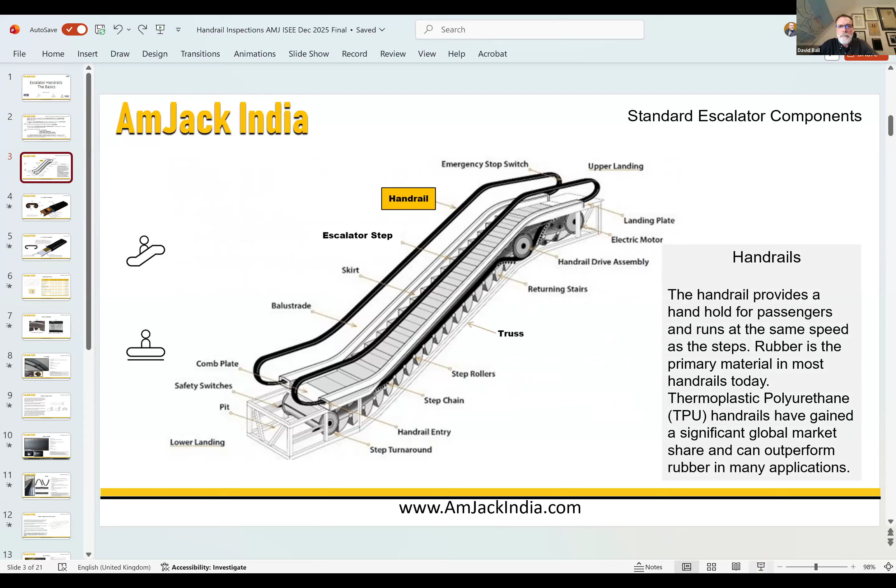We're going to start with this slide, which will help illustrate and guide most of our conversation today. These are standard escalator components. Today we're going to concentrate on the handrail component. The main purpose of the handrail is to provide a handhold for passengers and allow them to balance themselves entering, exiting, and riding on the escalator. Rubber is the primary material used in handrails today, but over the past 10 to 12 years, thermoplastic polyurethane (TPU), or in some cases just PU, handrails have gained significant global market share and can outperform rubber in many applications.

In terms of the escalator itself, today we're concentrating on the handrail drive assembly area. In this particular escalator, this is a reverse bend drive. I'm aware there are other handrail drive systems, but in service of today's time we're going to concentrate on this particular system, consisting of a main drive sheave. Either side of the drive sheave, we have roller bows, and this is where some of the adjustment in terms of handrail tension can be made. What's not particularly obvious from this image is that typically there is a roller chain or a hugger belt that presses the handrail against the drive sheave, and that's where drive pressure is adjusted.

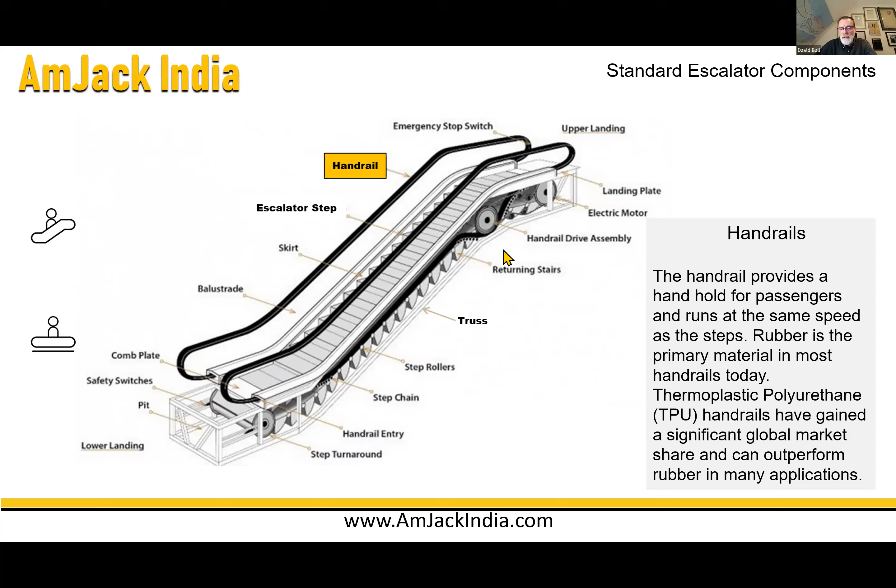This slide is meant to show a couple of things. On the left-hand side, we have the standard handrail labels or nomenclature. This is a cross-section of a rubber handrail, and we can see that typically one refers to the surface that you grab as the face. There is a crown transitioning around the handrail, there's also the shoulder, and then what will be covered on a number of slides is what we refer to as the lip area. The lip area, particularly the lip width, which is the distance between this surface and its opposite surface, is key for handrails operating correctly.

On the right-hand side, we have a cross section of a typical rubber handrail consisting of this brownish red material, which is referred to as the slider. On top of the slider, we see a fabric body ply. The orange part you can see is called the stretch inhibitor. These are a series of high tensile steel cords that run the length of the handrail. The main purpose of the stretch inhibitor, as you can deduce by the name, is to prevent the product from elongating or shrinking. Then again, on top of the stretch inhibitor, there's another rubber body ply followed by a fabric ply, and then it's finished off with a rubber cover. In this case, we see 6 different layers, all of different materials, all required to make up the SBR or rubber handrail cross section.

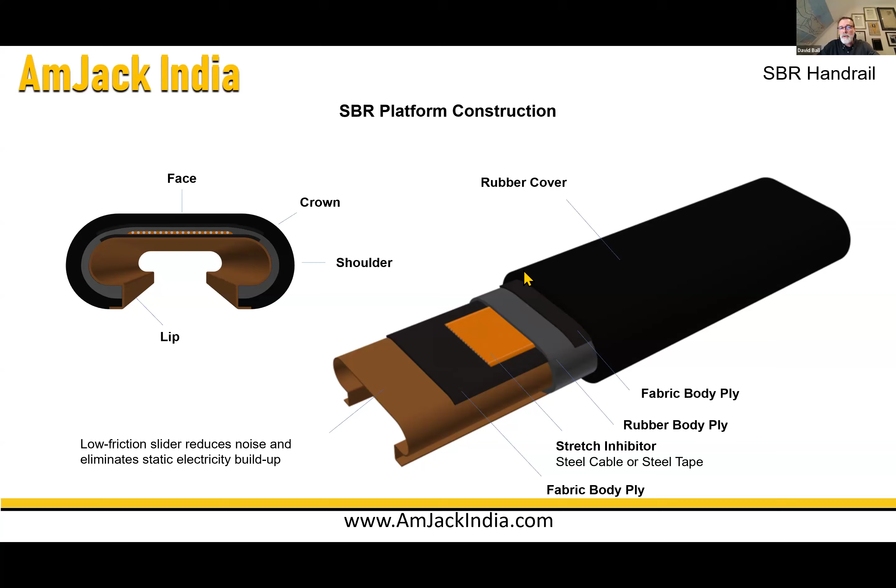By comparison, what we're seeing now is a TPU handrail cross section. If we go from right to left, we start with this white gray looking material, similar to the rubber product. This is the slider material, a spun polyester fabric which carries the handrail around the escalator and rubs along its guiding system. Again, we see stretch inhibitors, same steel cords, same purpose, preventing the handrail from shrinking and elongating. The only difference is in this cross section, there's only three elements. The third element is the thermoplastic body, which engulfs the other two components and completes the handrail section.

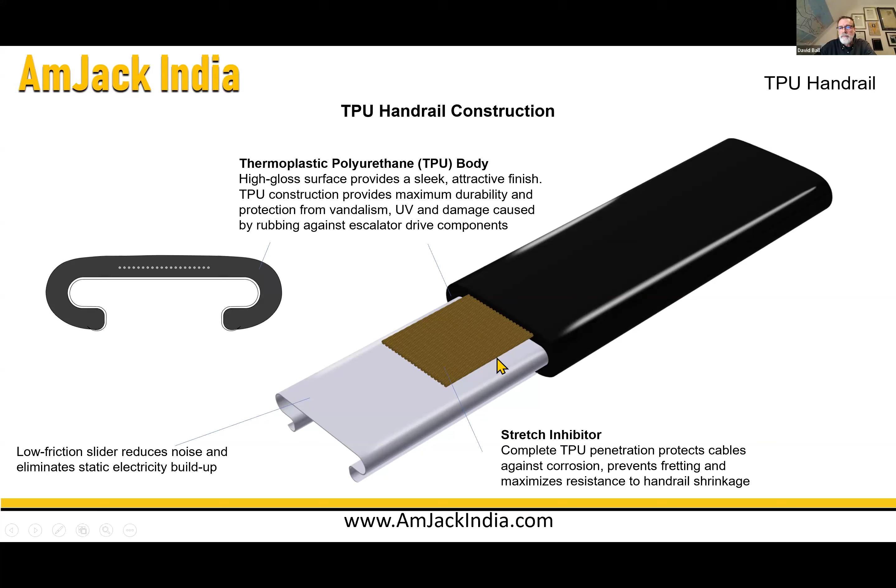So, handrail sections. A lot of questions that come from the field are: what handrail do I have, and what handrail do I need? If we start on the left-hand side of this slide, you can see a cross-section of a typical V-shaped handrail. All of the manufacturers globally have two handrail sizes or styles: a slim style and a standard style, one small, one large. Both the small and large styles can come in a C shape or a V shape. Sometimes in India, people refer to the V shape as a W shape - doesn't really matter, the fact is the cross section is visible here.

The main purpose of the V-shaped handrail is to provide the handrail drive mechanism with a larger surface area to drive the product. V handrails are typically used in heavy-duty, high-rise escalators or in public transit situations where the rider footfall is extraordinarily high.

If you are able to provide us with critical dimensions, illustrated in the image on the left, we start with the lip width, which again is the distance between this surface and this surface. We have an overall width, simply the measurement from side to side of the handrail product. There's an overall height, which is also important, and then there are two dimensions associated with the V. If you're able to measure these critical dimensions and provide us with the manufacturer's name and perhaps even the model of the escalator, then in most cases we can verify exactly what handrail style you require for your needs based on these criteria. If people would like access to these forms or tools, they can communicate with us after the show and we can make sure you get a copy.

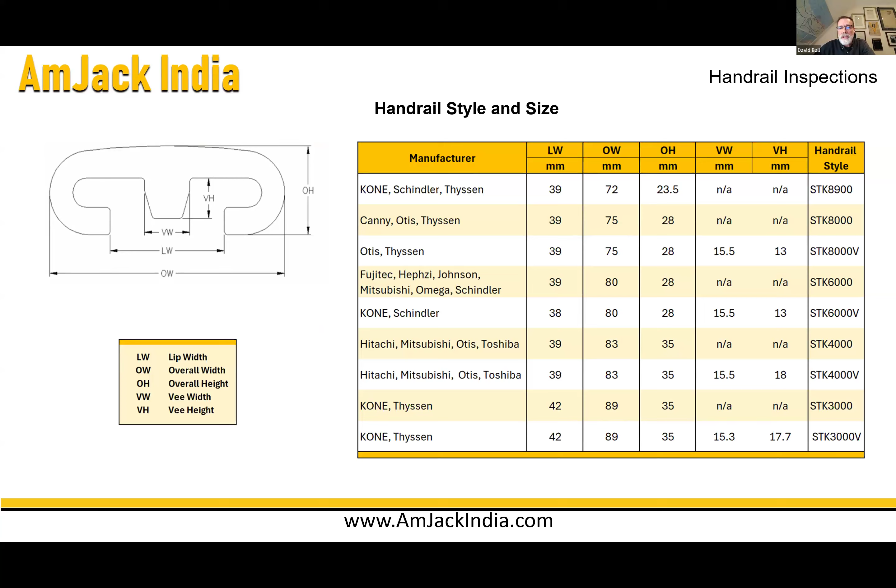In order to identify handrails in the field, all OEM certified producers must provide handrail identification markers on their product. On the left-hand side of your screen, you can see SBR or rubber, with a picture of the rubber handrail showing an embossed series of numbers and letters. On the right-hand side is a typical TPU handrail that has an etched series of numbers and letters.

These handrail identification numbers provide us with the age, the style, and the length information associated to handrails. So if you have questions about the handrails you're taking care of in the field, if you can locate this branding or handrail identification information and provide it to us, we can help you determine exactly which product you require.

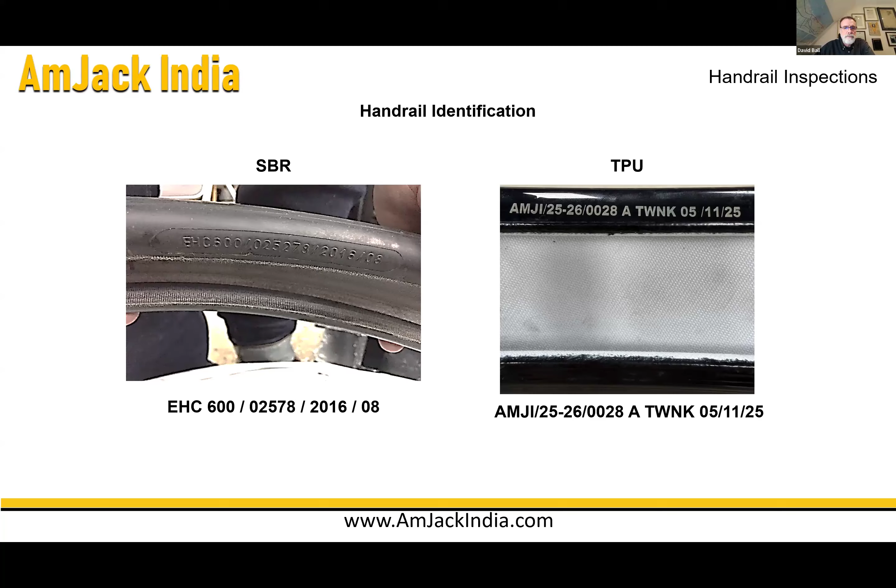The next few slides I'm going to show you are of typical feedback that we get from the field on a regular basis. Some of them will be issues developed by the running of the handrail, but in general we have a label at the top, pictures on the left, and on the right we have root cause indicators and hazards, and most importantly, at the bottom, we have recommendations.

Moving right along, we have, in this case, a defect known as lip buckling. This is a rubber handrail pictured on a newel end, and you can easily see the deformation of the lip area. This deformation is permanent and cannot be fixed or repaired, and is usually caused by improper coiling or uncoiling of a handrail before or after it's been installed on the escalator.

You can see in this image on the lower left, the handrail has been coiled and you can quite clearly see the deformations in the lip area. The only action required in this case is to replace the handrail.

We will come to coiling and uncoiling on the next slide, but in the meantime, one of the main points to pay attention to when coiling or uncoiling is not to do it aggressively, and to try and maintain an inner diameter when coiling of at least 700 millimeters.

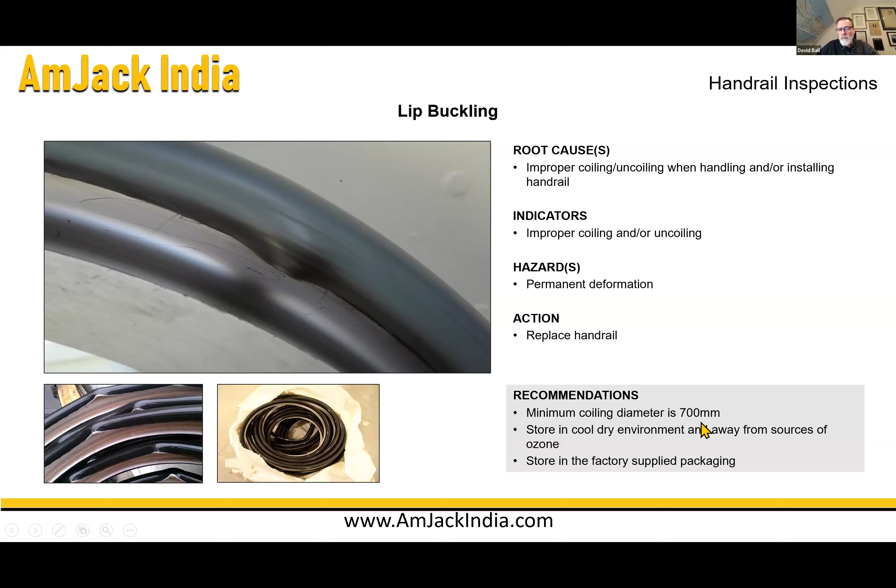As I suggested, another procedure which we have available, if you would like it, is the proper coiling and uncoiling of handrails. When coiling and uncoiling handrails, what we are trying to do is protect the stretch inhibitor from being deformed. Once the steel cables are kinked or bent or altered, they cannot be unkinked and they will eventually fail, meaning you will lose the service life of your handrail product. The best way to avoid that sort of problem is by learning how to coil and uncoil handrails properly.

Typically the handrail is laid flat on a clean and dry surface with the face down on the floor and a person either side. The two people simply take the handrail and begin to coil it, forming a basic donut shape, again making certain that the innermost coil is at least 700 millimeters. When handrails are coiled this way and stored in their original packaging in a cool and dark place, they can last quite some time.

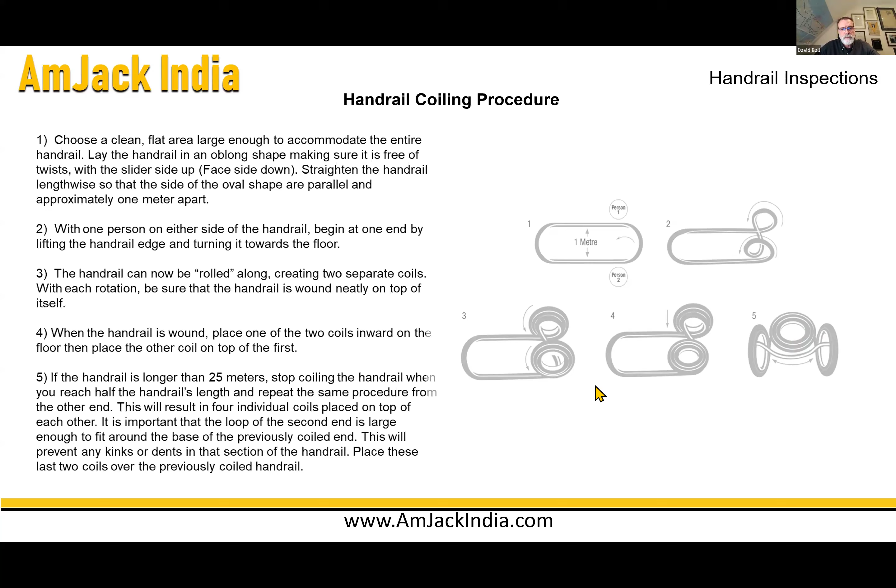This is exactly what an old rubber handrail should look like once it has reached 7 or 10 years in service. You'll begin to see these types of small weathering cracks. They are also an indicator that the handrail has been run in challenging weather or element conditions, for example high heat, high humidity, and lots of sunlight, UV, or ozone.

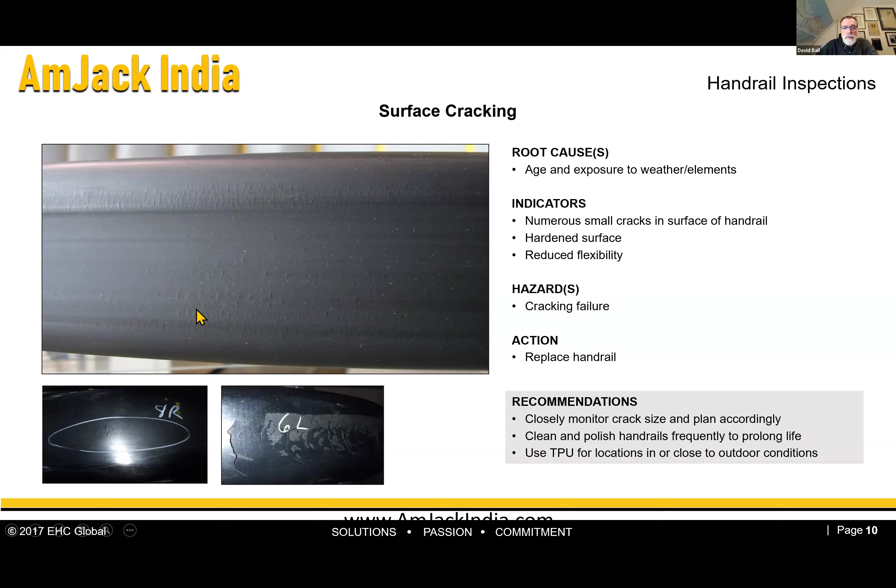Now, this issue that we're going to talk about next is called kinking.

Many of the OEMs or MNCs are migrating away from larger profiled handrails toward much thinner, narrower handrails. This is primarily for two reasons.

The first is that they wish to make the handrail graspable by most people. Small children, large and tall people are able to grab a smaller handrail more effectively. And if people are able to hang on to the handrail, their ride experience is going to be safer. So when the handrails get smaller, more passengers can grab them, and that's ultimately a more safe passenger experience.

The other issue is the OEMs are trying to remove cost from their escalators, and smaller, thinner handrails don't cost as much as big, thicker handrails.

But when you're handling small, thin handrails, you must be aware that they can be more easily bent in aggressive ways, and those bends can result in kinking. Kinking simply means the permanent deformation of the stretch inhibitor, the cables that are inside the handrails.

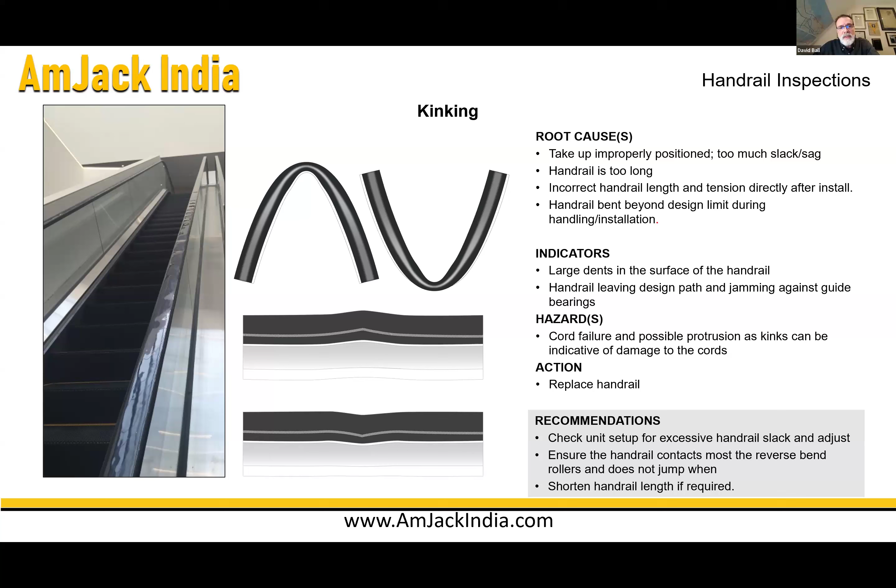If you are able to find a white grease pencil or some way to mark the handrail that can be removed after you've measured it, you would start at the top of the unit and make a mark. We're going to call that A. Then, staying on the incline or flat area — we don't want to measure around the lower curve or over the upper curve — we want to measure down from A, mark this B, and record that measurement.

We then simply turn the escalator on, push B up to where A was, and repeat the process. By the end of it, you're going to have B to C and C to D, and then you measure D to A. Combining all of those measurements, you will end up with the endless length of your current handrail.

When you have that and the style that you need, we can produce what you need in order to replace the handrail.

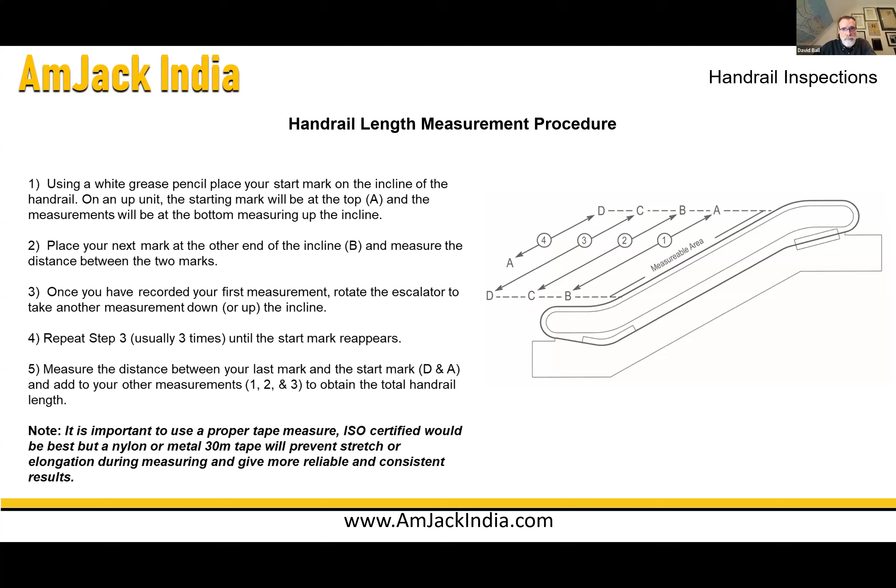So the next issue that has been reported in the field recently is something called wire protrusion. This is a direct result of the handrail stretch inhibitors having been stressed by kinking.

When the handrail is kinked, the stretch inhibitor can break. When it breaks, it can unravel and push up through the face of the handrail, making it dangerous for passengers. This is a very serious matter and needs the handrail to be replaced very, very quickly.

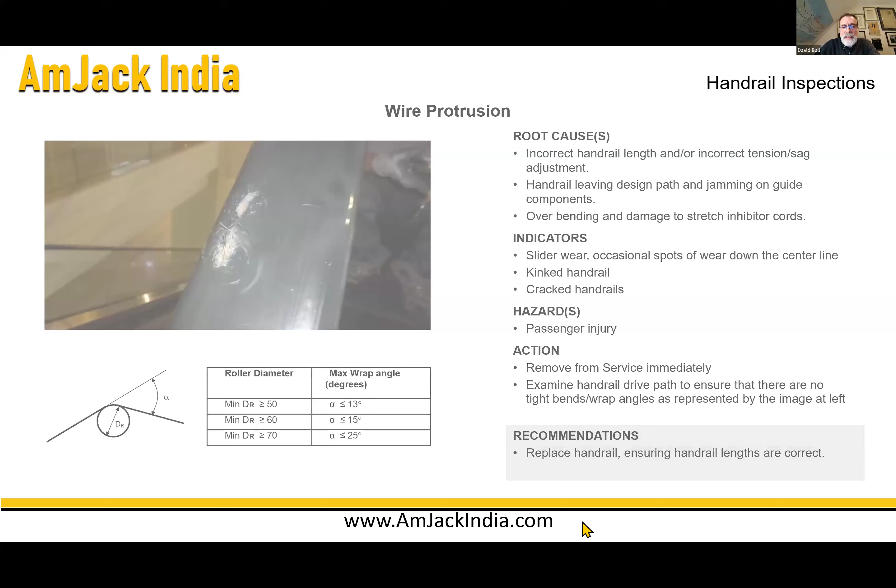A moment. Can't go back. So,

If the handrail is bent aggressively over a single roller, the stretch inhibitor can also be affected. And if it's affected, it can break and come through the face of the handrail. We don't want that to happen. You need to replace the product.

The next issue is lip cracking or shoulder cracking. In most cases, this is another indication of age, but it can also be brought about by poor setup or incorrect handrail length. Getting the correct handrail length is key to having a long service life. Once the handrail is cracked and as it rotates, particularly on the lower curve, the crack will open and provide a pinch point for passengers, and we don't want to see that happen, so the handrail should be replaced as soon as possible.

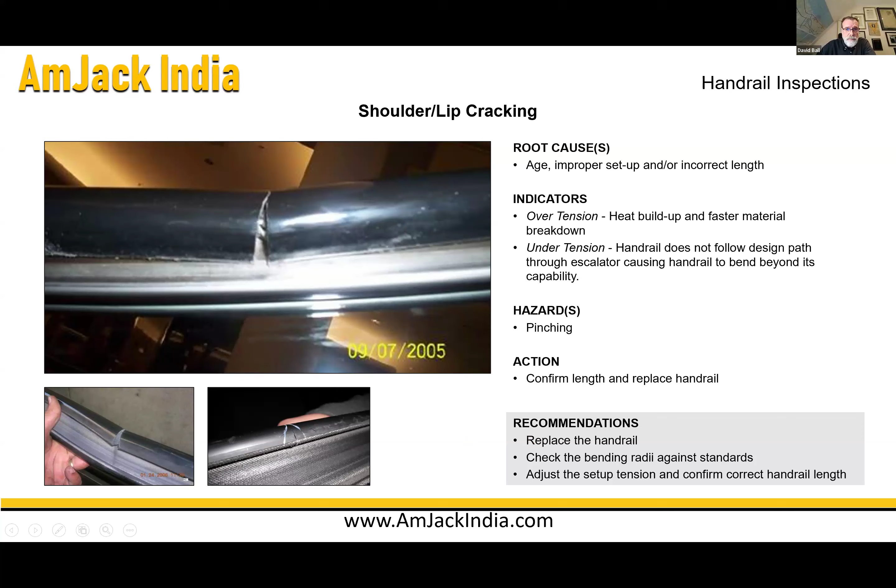One indicator that a handrail is under stress, particularly high drive pressure, is to measure its temperature. A well-run handrail should never run hotter than about 5 degrees above ambient temperature. That's a good indicator to follow if you're trying to diagnose issues in the field.

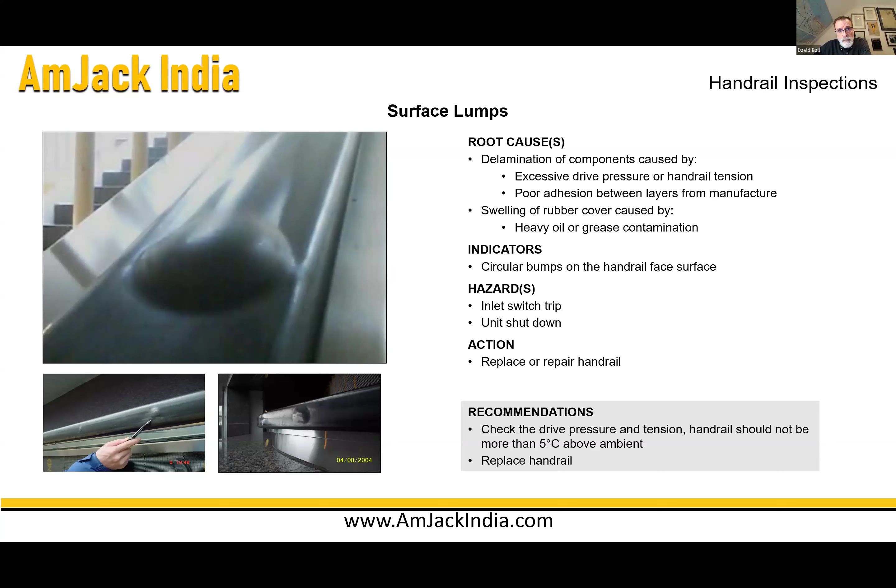Then we have excessive dusting. I'm sure a lot of you who maintain escalators are likely used to seeing dust either collecting on the decking or collecting at the newel end area. The dust is usually associated with rubber handrail products, and it is an indicator of excessive tension and extra friction in the system and wear between both the handrail and the escalator's components.

Sometimes incorrect tracking can also result in unwanted contact, and once you have contact, then you will have dust and debris collecting. The best thing to do in this case is to check for contact between the handrails in the unit, eliminate that contact point, and reduce tension and drive pressure. You can also switch to TPU handrails, which do not suffer from the same dusting failure.

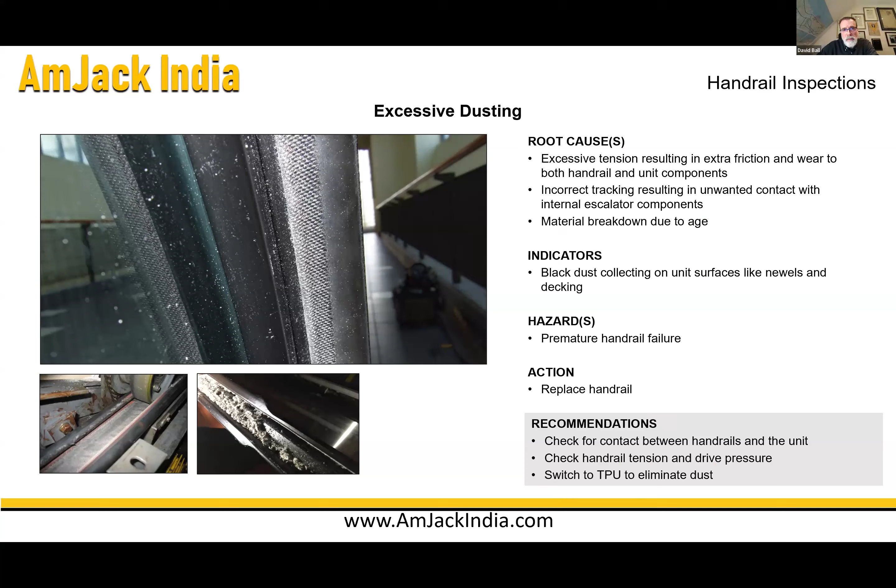It is imperative that you adjust the handrail tracking to make sure the handrail runs in the center of the drive sheave. For immediate relief, you can also trim away these fabric strands and the handrail will last a little bit longer, but typically you need to replace the handrail if it shows sliding layer damage.

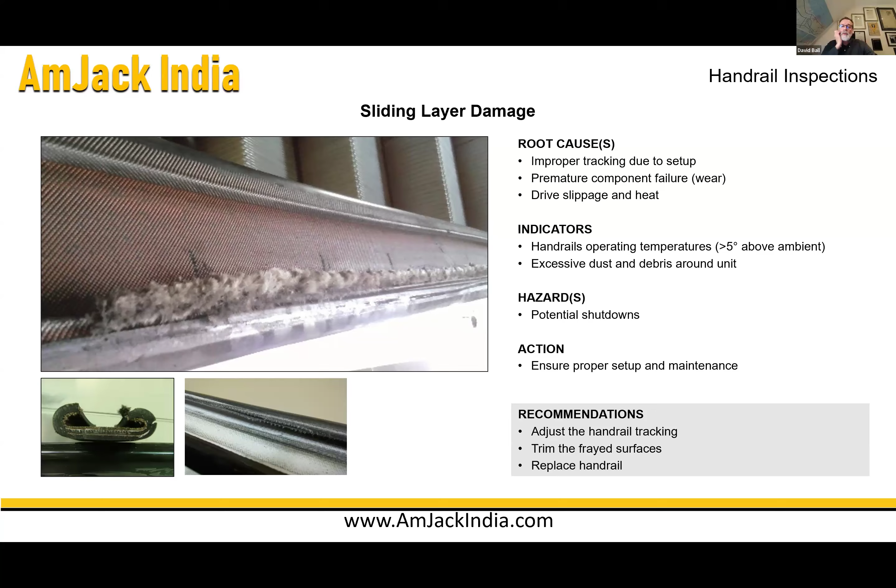Obviously, this is an unsafe situation because if passengers were to grab the handrail in order to steady themselves and the lips were not able to prevent it, the handrail could easily be pulled off the guide, leading to injuries and problems down the road.

The new handrail should always have a little bit of play side to side on the guiding system, but should not be sloppy. Too much or too little play suggests the wrong profile has been ordered. Please do not wax the lips or areas of the handrail to eliminate squeaking or rubbing. The wax eventually picks up dirt and debris from the escalator and turns into a very effective abrasive paste, which prematurely fails your guiding system and causes handrail damage as well.

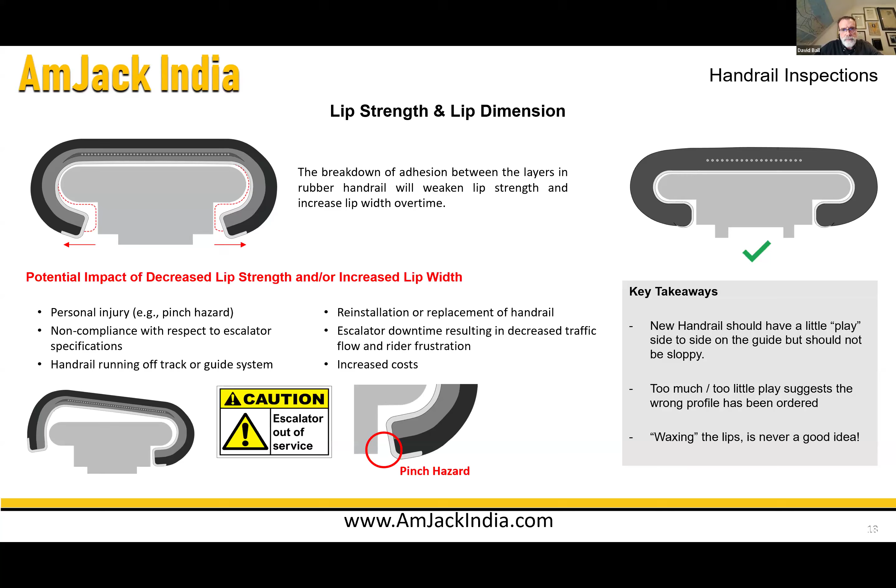So, two last issues I wanted to bring to your attention. In most transit, airport, and mall situations, some locations demand something called motion indicators. If you are visually impaired and you're trying to board an escalator, you can often be surprised or caught out by which direction the handrail is turning and how fast it is going.

So these marks, which we can provide on a handrail surface, allow passengers who might not be able to see terribly well, or who might be older or younger, to know that the handrail is turning. They can come in dots or diamonds or any other customized configuration, and we can put them on newer handrails when they're ordered. That's just another option that comes with the TPU product.

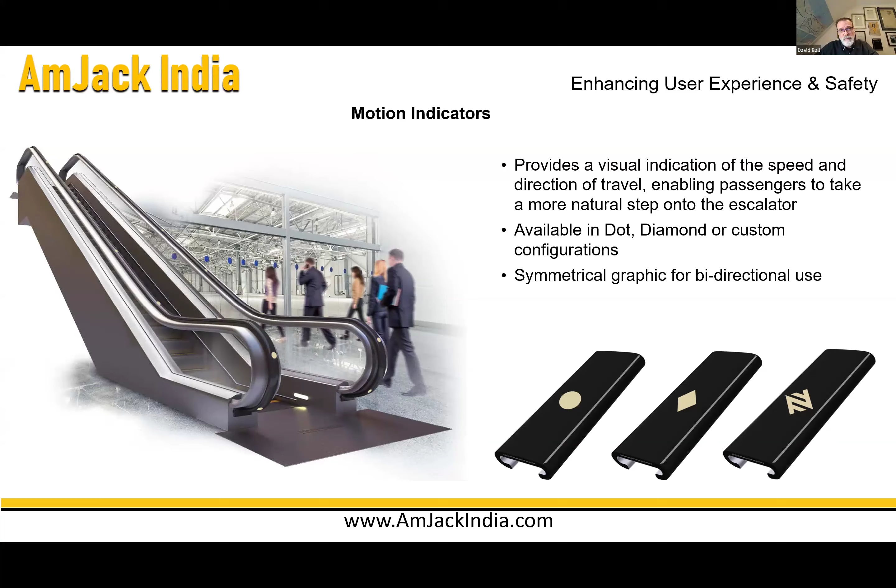For those of you who might be interested in available standard and non-standard colors, handrails do come in black, obviously. Handrails can come colored. There are standard colors which are red, blue, gray, and charcoal. And then there are non-standard colors, in some cases, beige, green, and brown.

For those of you who ride the Pune Metro on a regular basis, you will know that there are two handrail colors on the Pune Metro. The Metro decided to help people find what line they were on by coloring the handrails. So when people exit trains and see an aquamarine handrail, they know they are on the aquamarine line. That's called wayfinding. Handrails can be used to enhance wayfinding in situations like metros and high-end shopping malls.